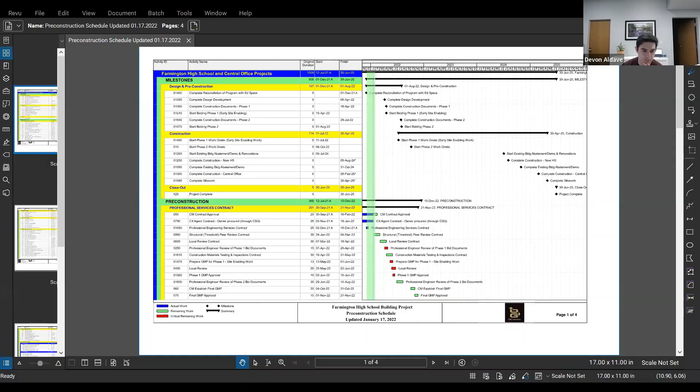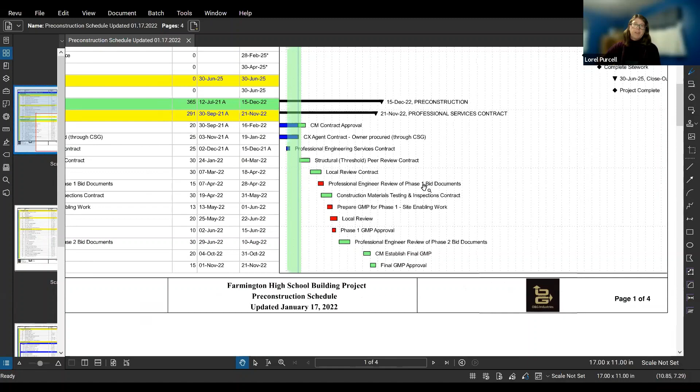So we have our pre-construction schedule update as of January 17th. As I mentioned at our last meeting, I will be providing updates to these on a monthly basis, so it'll probably be the second meeting of every month. What I'll do is highlight where we've been, where we're going, so we can talk about those items and what the updates are.

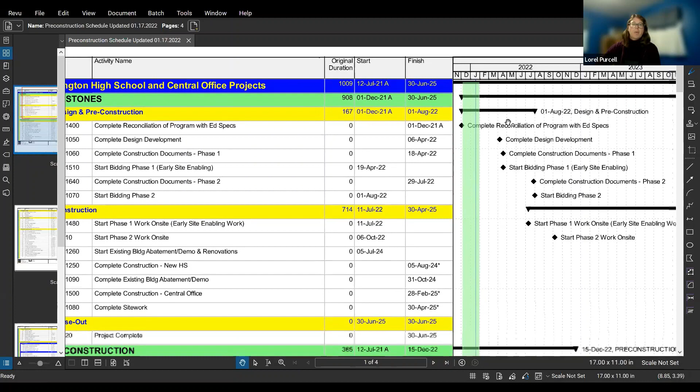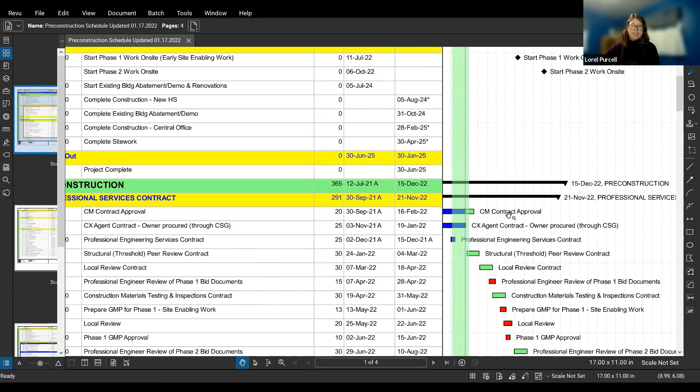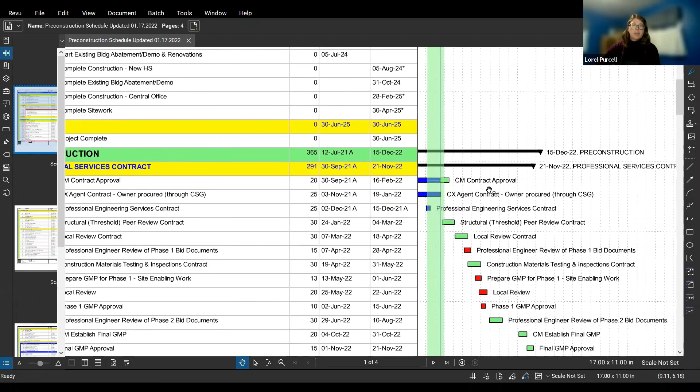So just going down the schedule I've already shared with everyone. The CM contract approval, I bumped that off to February, not knowing when that was going to end. It's still been lagging, so just keeping track of that. As mentioned before, the commissioning agent, that's being presented tonight, so I'm showing that we're approving it tonight, but who knows? The professional engineering services contract has been approved.

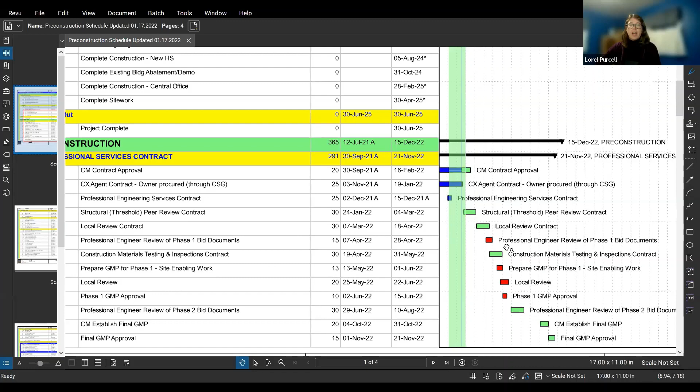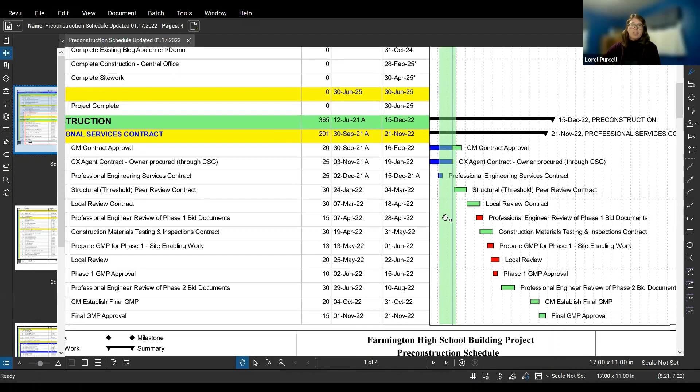And you will see, as Mark mentioned from CSG, we've got more contracts that will be worked on. So the next one will be the peer review contract, followed by a local review contract. Those are the next contracts that'll be up that you as a building committee will be starting to see over the upcoming time frame. Again, this is pretty much reflecting through the beginning of February, so just to let you know what's up and coming for tasks.

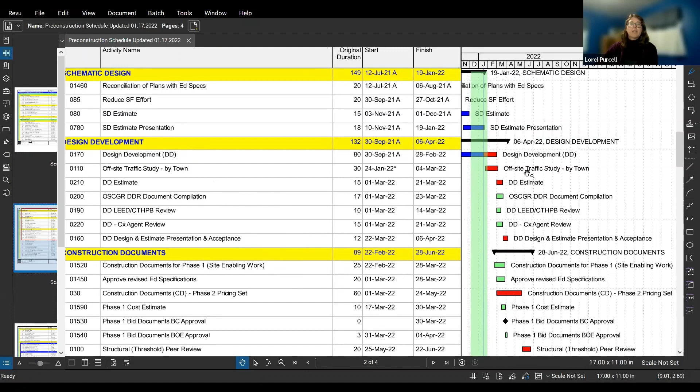On the next page, the SD presentation - since it is on the agenda, I'm still carrying this SD presentation forward. In the meantime, Tae-Soo Kim has proceeded on with design development, so that's a very critical time frame here. This end of February they need to stop drawing, and then we need to start doing our next estimate, so that's something very critical to stay on target with where we are.

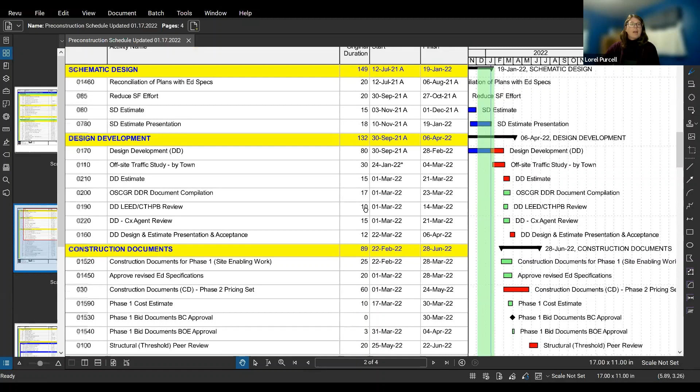And I forgot to mention at the very beginning, we are still on schedule, but we are coming up to some critical time frames. Also something we're going to start following up with the town is an offsite traffic study that the town will be conducting. So we want to start tracking that as well, because that will affect OSTA, our OSTA submission.

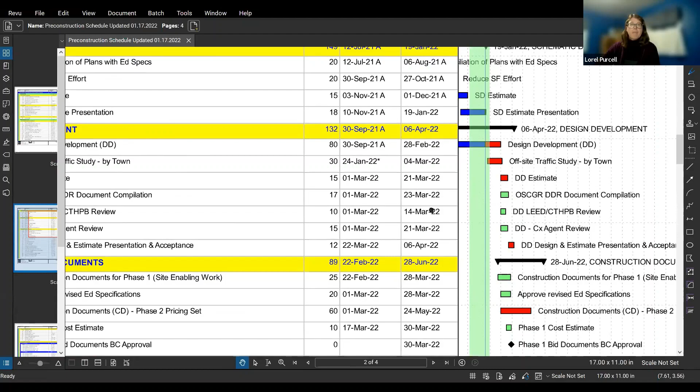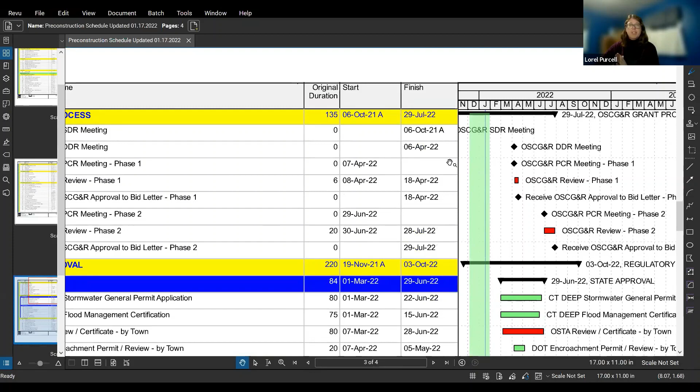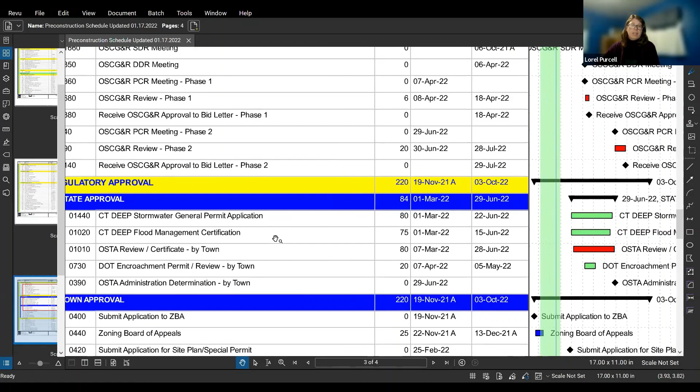Let's see what else is up and coming. We had mentioned with Bob Selmer when we were looking to see him next with these PCR meetings, DDR meetings - so they know that we're going to be going up there sometime in April. Kind of sort of coming up soon is our applications for DEP. I don't know if we need flood management, but for the stormwater. So those are things that we'll start to track.

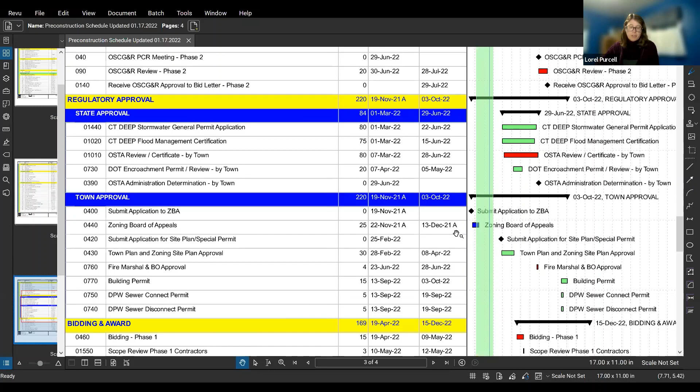For zoning board and appeals, that did get approved. Let's see, what happened with that - that was on the 13th. There was a hearing and a decision was made, and we just need Kat's office to verify that she's received formal notice of the decision. So we've made it to - go ahead. I have received formal notice. Perfect, so that's good, that's behind us.

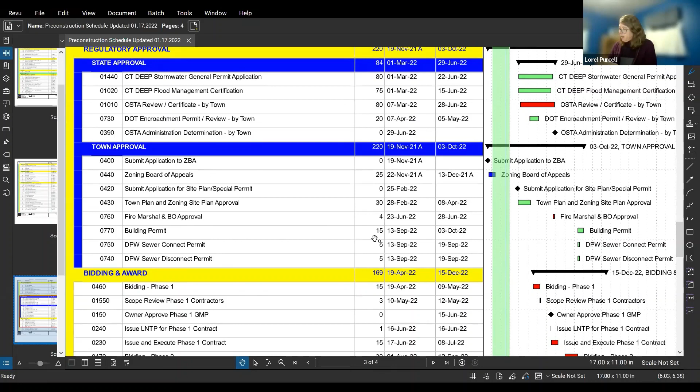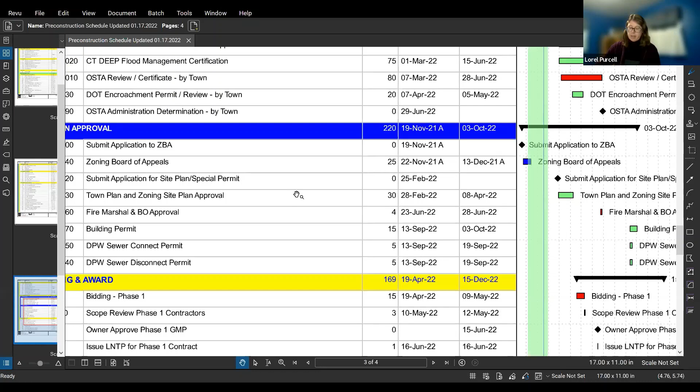Let's see what else we got. As Richard mentioned, getting ready to prepare this site plan special permit - he has the 23rd, I have the 25th. It's somewhere in that time frame, but that's our next up because that's about a month away, and that also is critical for our timeline. So making sure we stay on for that. This is very, very critical, as Richard mentioned, to get a hold of the town planner and figure out what those requirements are so we stay ahead of that. So that is underway.

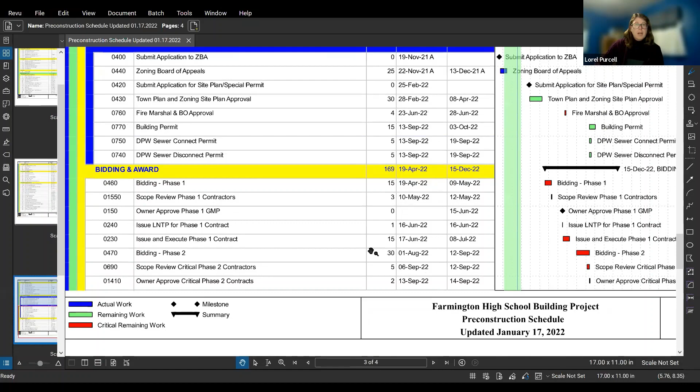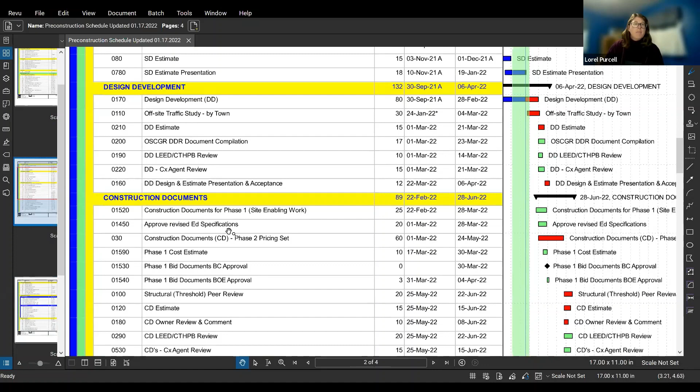And what else is coming up? I think that's about it. Oh, one more thing I kind of breezed over because there's nothing after bidding and award - back on construction documents, and we're going to be talking about this tonight as well, is the enabling phase and what we need to do. So just a heads up, about a month from now, TSKP needs to be able to start working on construction documents, and there's work to be done before they can start that. So tonight we'll be talking about this enabling work and if that's going to proceed. Again, if we're going to be doing that this summer, we need to get started with those construction documents. So again, just to reiterate, we're still on schedule and we're monitoring these activities.

And I'm pretty much done with my report.

Just a quick thing from me. So just for clarification for new members, when Lorel mentioned the CM contract is still kind of out there and we're finalizing, that is the contract with O&G. So we are executing on it. We're moving, we just have to make some minor modifications, just so you're clear on that.

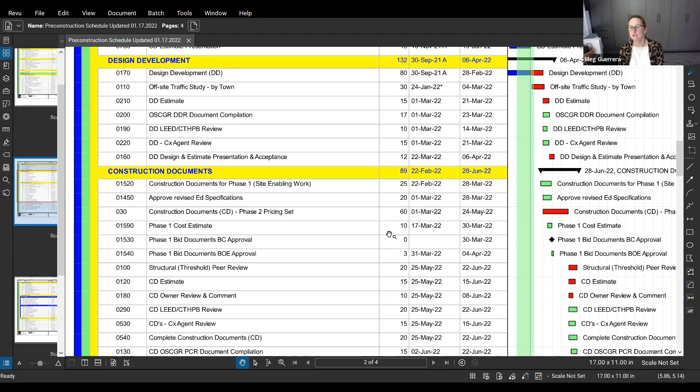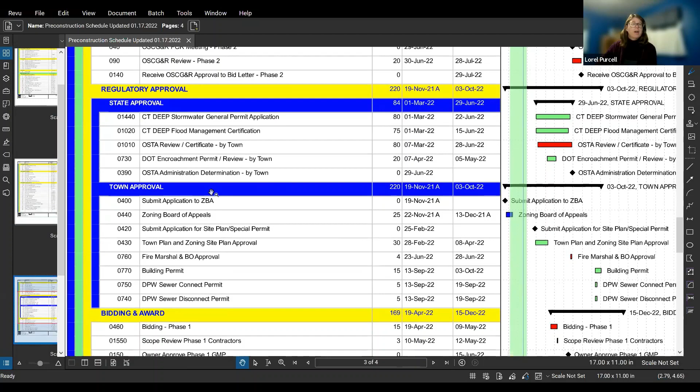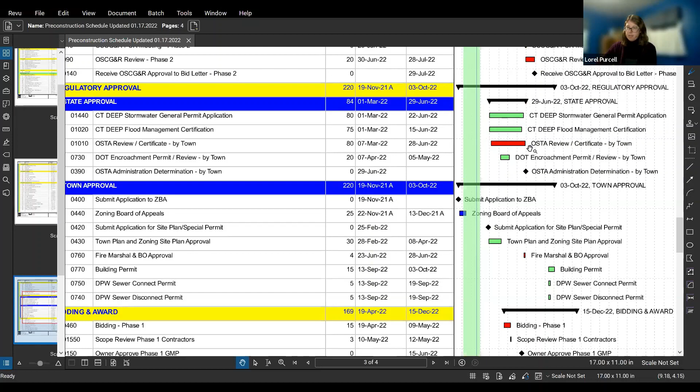And Lorel, can you tell us what OSTA is? Office of State Traffic Administration, I believe. They are a state agency that is notorious at this point for holding things up. So we know it's a critical item. It's on the checklist with OSCG&R, that's Bob Selmer's office. It's a checklist required for bidding, awarding of contracts, and all that. So it's just one of those reviews, check boxes that we need to keep track of.

Right, the state reviews the traffic. There's a traffic study that's done, identifies cars in and out, if the project will impact more traffic. So for example, in this case, we don't anticipate, because the number of parking spaces or individuals that will be attending the school, or staff, in that whole area isn't going to grow to a number that we expect would ultimately affect a new traffic state highway work. So we hope that that's a smooth process with the state.

For example, if they were to build a new shopping mall right there that was going to impact, or offices or something, a new residential community that was going to impact the number of cars going back and forth, then I think we would have a bigger concern. But Lorel is correct in that it is a process and it does take time, so we want to get in and out of that process as soon as possible.

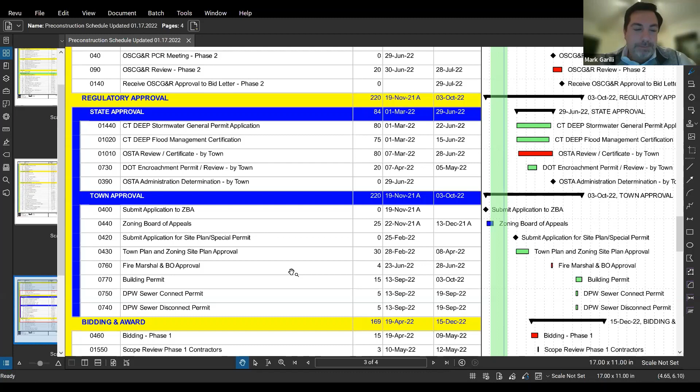Great, thank you. Any additional questions for Lorel on schedule? And please let me know if I went through it too fast, because I'll just slow down next time. I was trying to keep everybody interested.

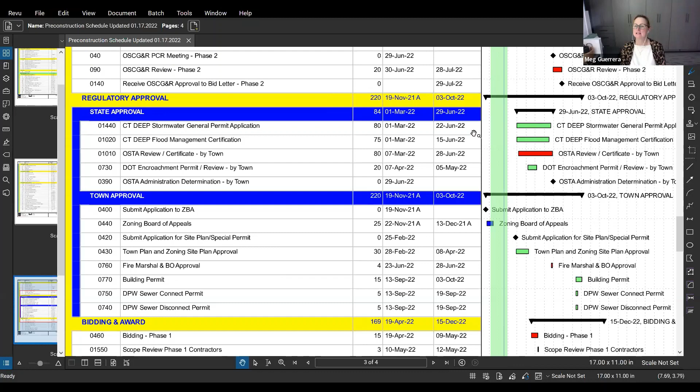All right, great. Anything else, Jeff? Anything you need to add within the CM report? Are you good? No, I'm good, Nick. Thanks. All right, perfect.

All right, excellent. All right, so we're going to move on to our final reports here. So next is F7, which is the Communications Subcommittee report. Kat, do you want to handle that one?

Sure. So the communications subcommittee met just before this meeting. We worked with IRA to finalize our outreach plan moving forward. We had talked about earlier doing some Zoom public meetings, just an opportunity to check in with the public, let them know what the progress of the project is at various checkpoints. So we are planning for a Zoom public outreach meeting in February and another one in May. We think the February one will be more about the process, where we are, what we've done since the referendum passed, and the additional checkpoints we need to get through in order to break ground. And then the May one will be a little bit more, when we have final designs, we'll be talking about the site plan changes that will be occurring, presenting those to the public at that time, and offering an opportunity for Q&A. Those will be aligned with additional newsletters to go out to spread the word about the progress, a Q&A section, and then inform them of these upcoming meetings. So that's really our plan for the next probably six months, to do that outreach to the public.

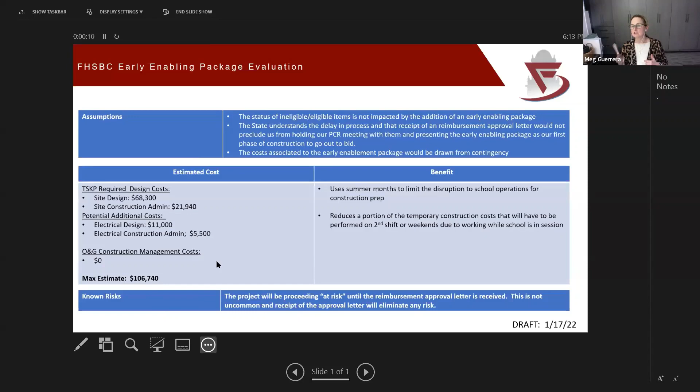So what I wanted to start with, Devin, if we could pull up that slide, just to give people a little context and some quick hit information to help guide the conversation on how we want to move forward on this decision, because it's something we have to do sooner rather than later. So as a general point of conversation, I'm going to open this back up to Richard, Mark, and Laurel as well to provide any additional context I might miss, to make sure the building committee has a good understanding of everything we're going to talk about tonight.

But when we're talking about an early enabling package and moving that work forward, there's a couple of assumptions here we need to keep in mind. The very first thing: the status of ineligible and eligible items is not impacted by the addition of an early enabling package. So we don't have to worry about any conversation of, oh, if we do this, what does this mean, what are the impacts - ineligible, eligible items for reimbursement and all that. That is an assumption we have on hand.

We've talked a lot about having conversations with the state and the scheduling around that. CSG has confirmed the state understands the delay in process, and that receipt of a reimbursement approval letter would not preclude us from holding our meetings with them and presenting the early enabling package as our first phase of construction to go out to bid. So this is just staying to state standards and process. We want to make sure that if this is something we move forward on, as far as bringing this early enabling package forward and approving it, the state understands what we're trying to do there and the goals, and that shouldn't have any impact on our process with them.

And this is important for the building committee to understand: the costs we're talking about here, when we go into estimated cost and benefit, would be drawn from contingency. So this is not something we budgeted out or is included in our current budget. It would be something we'd have to consider as a draw from contingency. So keep that in the back of your mind as we're talking about this.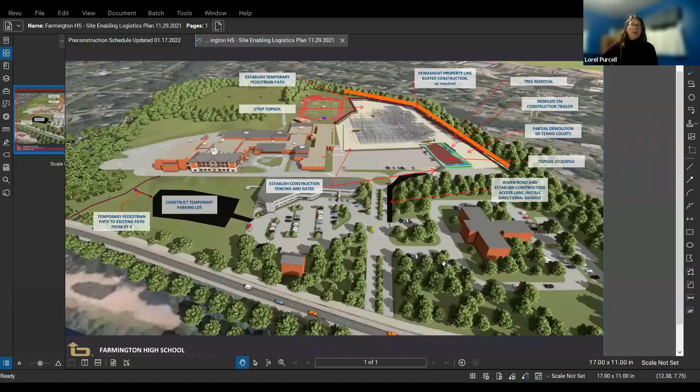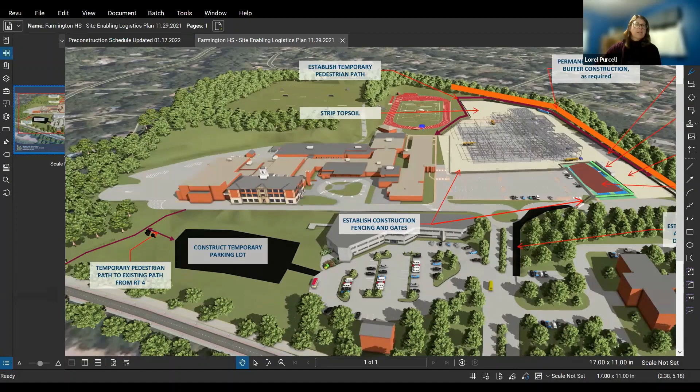Yes, Lorel. Okay. So again, just to reiterate, what we were envisioning doing was constructing this temporary lot with some sort of access to get to the existing sidewalk along the side of the school. We were going to do this rough grading and temporary bituminous drive here to allow for our construction access with signage.

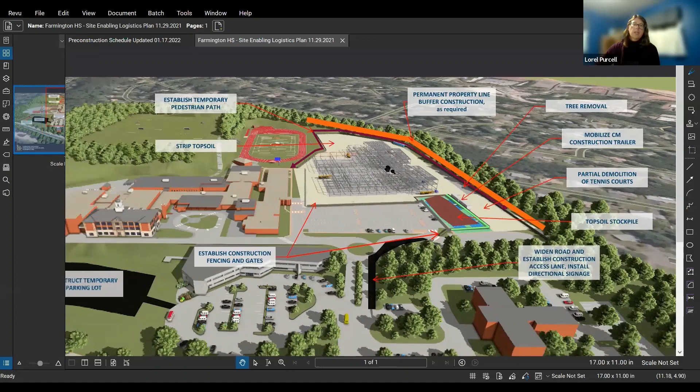We were going to put all our temporary fencing up and start stripping the topsoil. As Mark mentioned, we'll be able to store some within our staging area, but chances are we'll also be hauling and putting it where it's going to be needed in the end, which is where the fields will go.

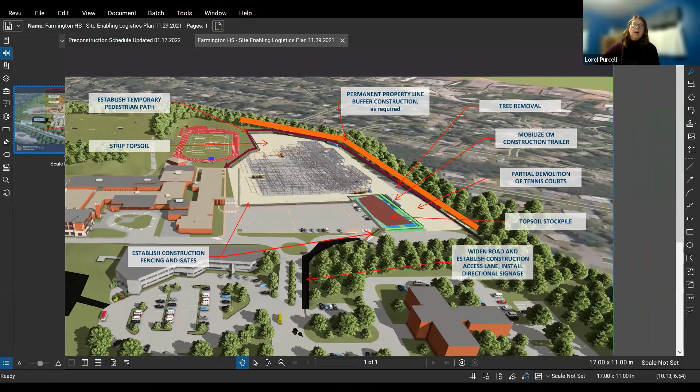So that heavy equipment movement wants to be done ideally when there's no students in school traffic. One of the costs I foresee needing design for from a temporary standpoint is the traffic flow, because we're going to be interrupting the way the existing drop-off works. We really needed somebody that does traffic design to make sure that once we've cordoned off this portion of the parking lot, how is that new traffic flow going to work? We were aware the buses were going to continue to operate as they do now, but how is that traffic flow going to work?

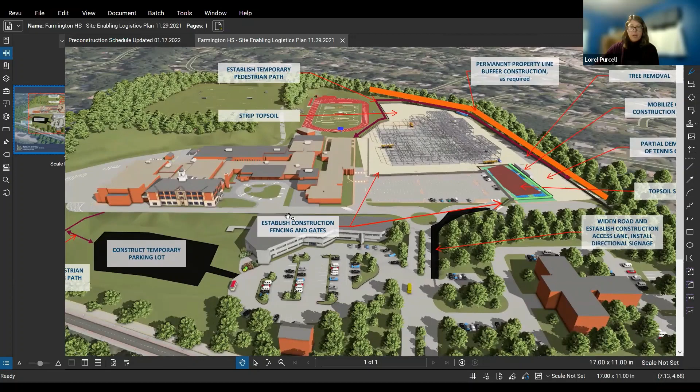So in that 106, I believe, is the engineering required for figuring out how everything can move smoothly with the queuing. So that should be in there.

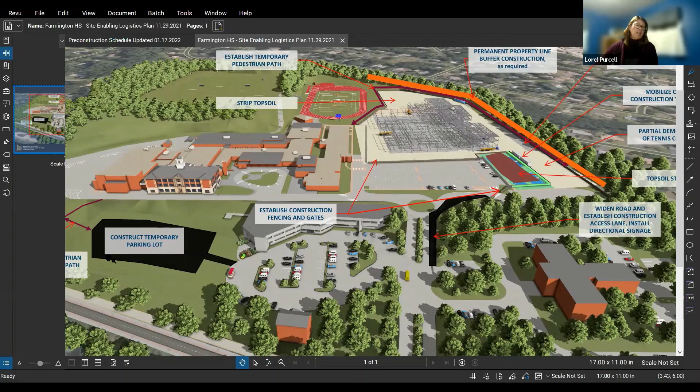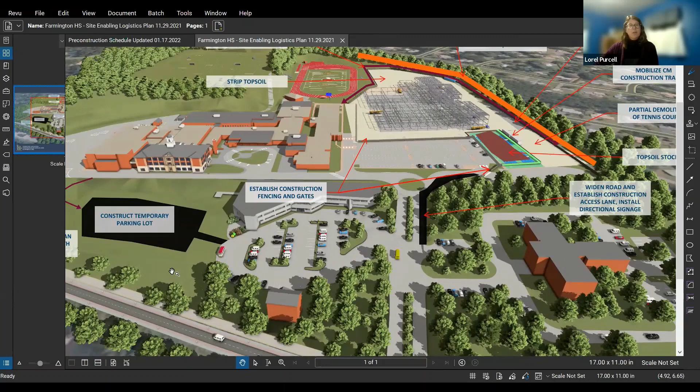If this was just a pure lot and we just showed this to a contractor and said give me a lot, the contractor would probably do some rough grading and put in some asphalt. Now if that's acceptable to the town, and if the town's not going to require storm drainage calculations or curbs, or anything from an approval standpoint, then there doesn't really need to be a design for it. But if the town's going to require some design effort to be able to approve this going forward, then that's where the design team is needed to provide those services.

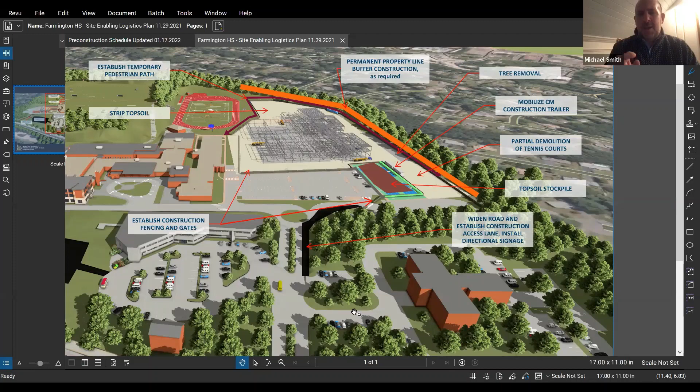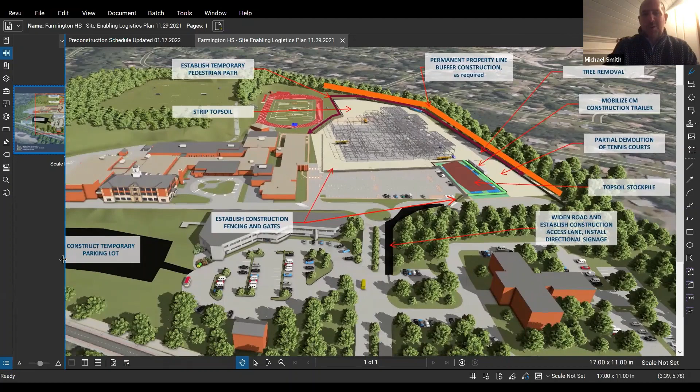So a follow-up question I have is the discussion happening tonight - as TSKP put in their original estimate to do all the work, was there never envisioned this dogleg right that you've got for flow of parking and construction of a temporary lot? That was not part of the scope of services you were bidding on? No, it was not.

So I am understanding that whether we do it now or later, somebody has to design that stuff if a design is required by a designer on your team. Precisely. Follow-up question: are you the right people to be doing that? This looks like site work. Would this be SLR that would do this? It could be any qualified person, it doesn't have to be our design team members.

So when Lorel said that the design team needs to do it, it's not that it has to be our design team - a design team retained by ONG can certainly do it. So SLR did provide, Richard's got a piece of the oversight, but it's his landscape design firm, so Richter & Cegan and then SLR on the engineering piece. So that's part of that 60,000 whatever we were looking at. Correct. My apologies, because I am clearly understanding now that this is a scope of work, not a when does it happen, but it is a total scope of work that was not in the original package. Correct.

And I would like to add that you don't necessarily have to do it through us, you can hire someone else. That is what I'm - as you describe what this is related to, I'm left with the question of why not simply have the site engineers do this work? I agree, I don't think the architects need to be involved. So if it was included in the early enabling package, TSKP takes the lead with the portion to the state, unless I'm wrong. Right, with just some additional filing costs associated with doing two filings versus one.

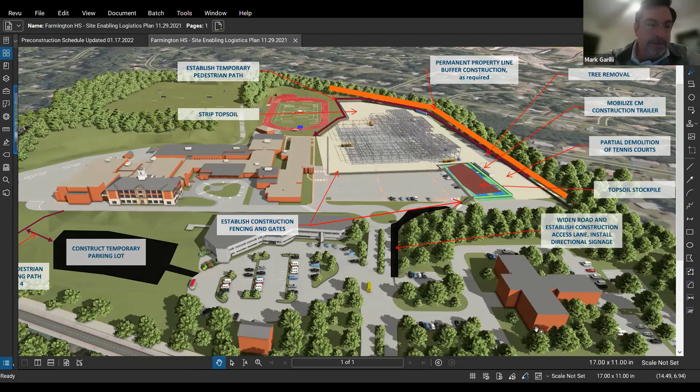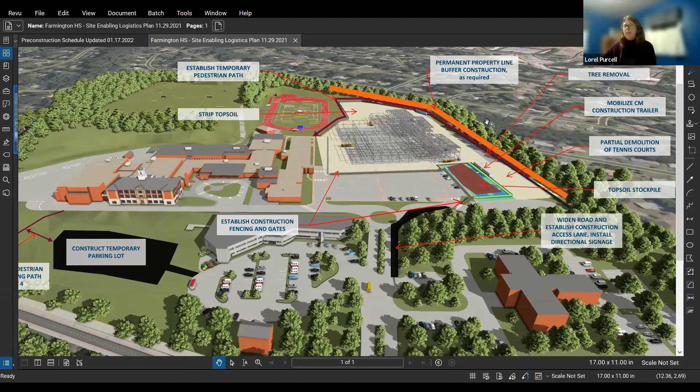Do we have a sense of what that - do you have the SLR bid you can share with us, what portion that is? Because to me, that's what you got to pay, whether you pay it now or later. You want me to stop sharing? I think that was in the packet, but maybe not. It is, yeah, it's in the agenda. Yeah, it is in the packet.

In the meantime, Chris, I know you had your hand up, Chris Fagan.

Yeah, a lot of this stuff has been answered, and Lorel, I was going to ask if you still had that picture so I could put this all back in perspective, but maybe I'm missing stuff here. In doing what I do for a living, presenting large cases to senior management, one question they always ask is why are we hearing about this now? It strikes me this should have been baked in somewhere along the lines. Maybe I'm just missing it. I understand the merits of it, and I think it's great to do it during the summer, but it seems odd that this is coming out with an additional $100,000 ticket attached to it.

If I could answer that, we were never asked to design any type of temporary features until we were asked to do that by ONG. And that typically isn't done by the design firm.